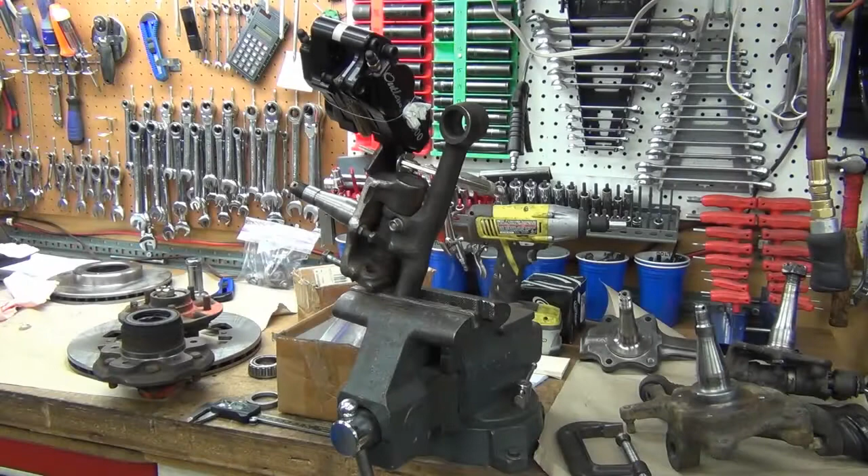Now, I've done a little fitting already, and I know that I can get the nut on here if the seal, if the back of this hub is basically pretty much even with the rise, God, head's not in the game today. Anyway, the boss on the bottom here of the spindle.

So anyway, this is about 7.5 from the bearing to the top of the seal here. It's about 7.5 millimeters. Okay, so I took a spacer. It is just a hair over 8 millimeters. I'm going to put that on there, and this isn't precision at this point, it's just a matter of testing fit. So here, these are the same bearings that the hard body uses.

So it's on there loose. I don't have the spacer in it. I'll just have to make sure that I tighten it down enough that it sucks up flat there. So see that wobble there? I'll just tighten it up enough that it no longer wobbles. And I do have plenty of room there for the cotter pin to go in. So now what I can do is take a couple measurements and get an idea here.

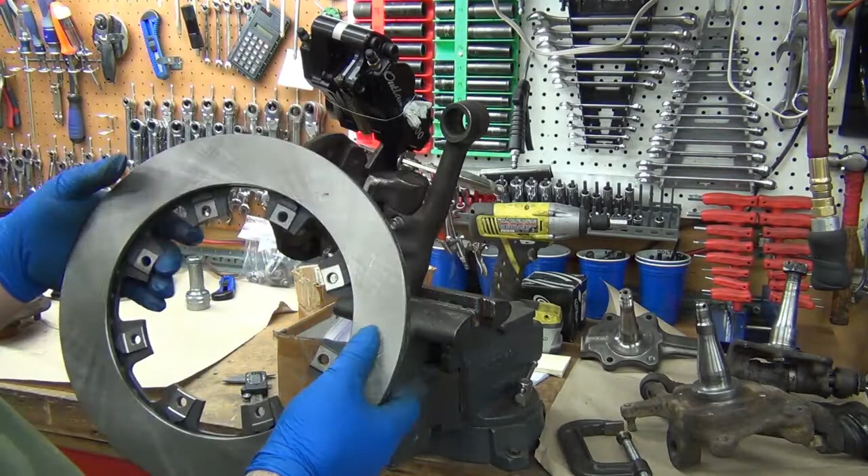There's two choices. Basically, this is the caliper. Okay. 11 3/4, I believe. So for where that caliper is sitting right now, I've got a piece of steel bolted to the face of the spindle, and the caliper is clamped to the backside of it. So that would be like having a flat bracket on there, and thickness of that bracket would not matter at that point. But what that does is that means that the rotor is going to be sitting about there. And I need to take a look. That's about 5/8 of an inch, maybe 3/4 of an inch, which wouldn't be too bad.

That means that the adapter here, I could basically get maybe 3/4 inch plate, you know, aluminum or whatever, and cut the adapter out of that, or have them cut. And that would keep this bracket nice and simple. Also, by keeping it back this way, that kind of distance, we'll do some measuring here and see what I come up with, but I'm hoping it leaves enough for a 3/8 inch bracket back here. Okay.

So let's see here. From here to here, I want to stay fairly parallel with the plane there, and then I want to rock it back and forth to make sure I'm even, and it's basically 55 millimeters. It's 55.07. We're going to call it 55. The rotor is 21, okay? So where'd my pencil go? We've got 55 millimeters of space to play in. We've got 21 of that taken up by the rotor. Okay, that leaves us 34 millimeters to play with.

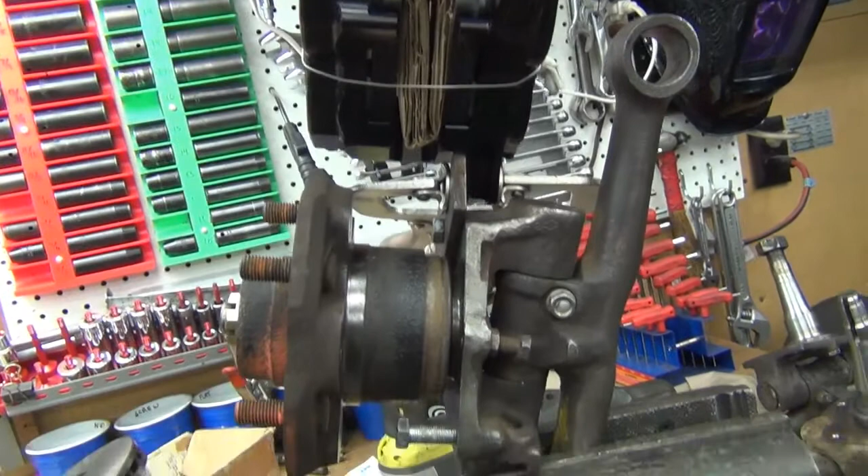We'll get a little bit different perspective here. This is what I'm talking about with it being flush with the boss there at the bottom. There's just a little gap in there. See it at the bottom there? So it's pretty close.

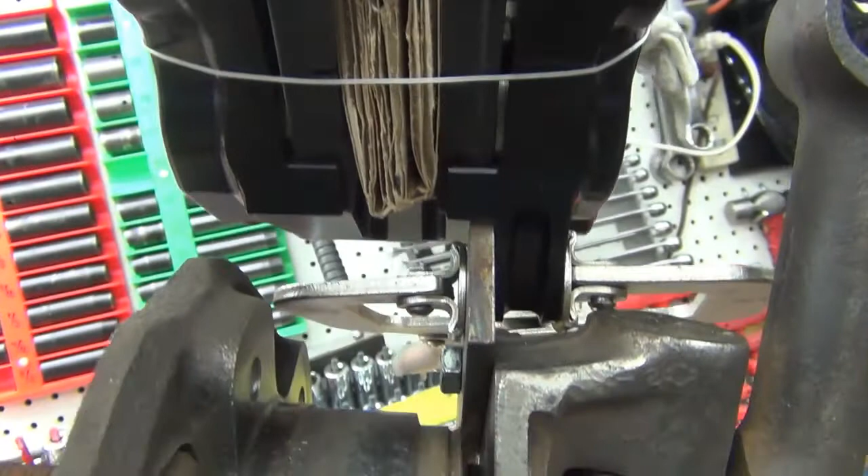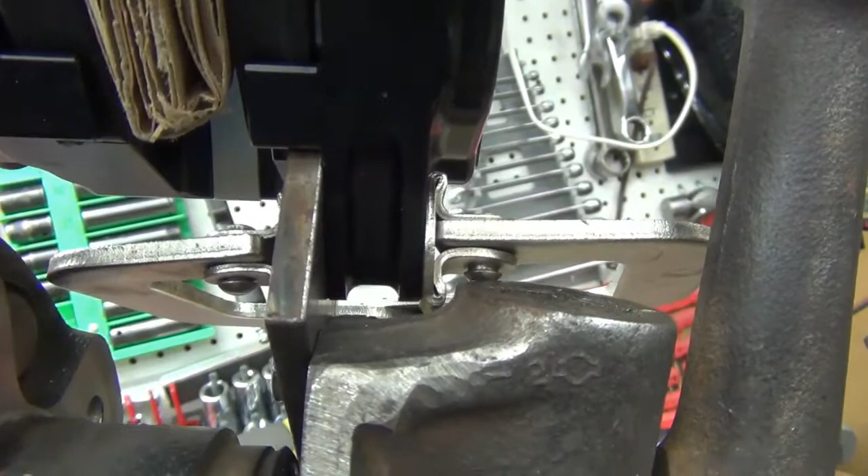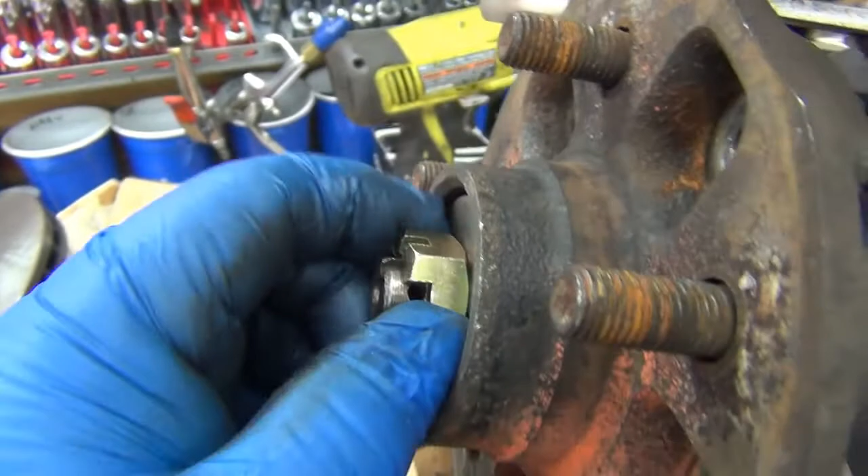You can see from where the pads are at that I easily have another 1/8 of an inch right here, because this is a 1/4 inch plate. I could easily come out another 1/8 of an inch and still clear the rotor easily. And so then let's see here, and that's where we're sitting with the hole. Perfect.

Now this is the shorter castle nut that I use in some of the other projects and stuff like that. So okay, here's the idea. Here's what I'm looking at. This is what the spacer looks like typically. So if I take this off, they use the same bearing. So that's like that.

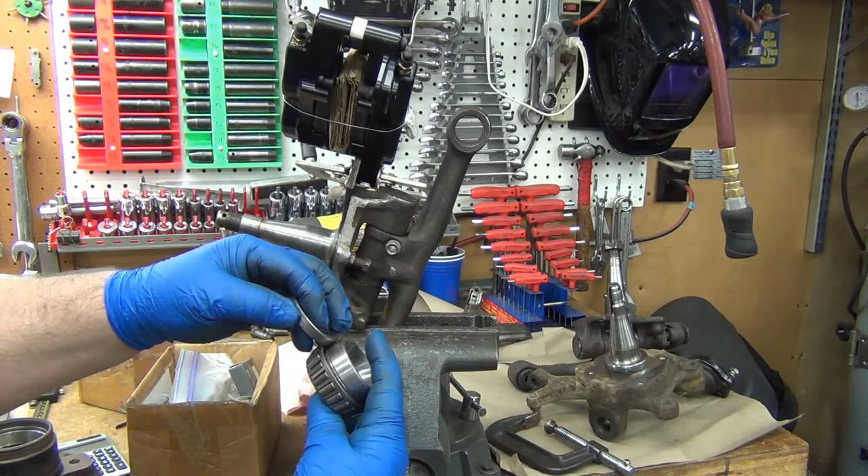Now what I need to do is I need to cut the back there down to the 8 millimeters. I need to take 2 or 3 millimeters off there because I think it's about 12 right now. So what that'll do is that'll go on there, but it'll be a good bit shorter, and that'll get the bearing set where it's supposed to be. And I'll double check the measurements.

Well, let's see here. We can tell right now. I want to make sure that the bearing doesn't bottom out. And if I bring this in here, I can see the whole hole. Yeah, so I'm nowhere close to having the bearing bottomed out. So that's good. That's one of those other things to kind of check on.

When you put it on a hard body hub, something like that, it's a little on the long side, and guys crank these down extra hard to get the cotter in. Well, that loads the bearing up too tight and kills the bearings prematurely. So anyway,

looking good. The easiest way to do some of the rest of the measurements here will be to put it in CAD. And I can also take a few measurements here. Actually, if I look this up online, chances are good the measurements are already there. I just got to print them off. That tells me how far it is, and it makes it even easier because it tells me what radius this is on. So then I can set that radius from the center here with the rotor I have. I'll see if I can explain that a little later when I got something more to look at.

Just like this is the stock Toyota rotor. That gives you an idea what it's moving up to. Okay, and so you can see what I did is I basically took one of the test adapters that I use for the hard body upgrade, the other 521 disc brake upgrade using hard body stuff or 720 stuff, and I cut it down here to the 8 millimeters.

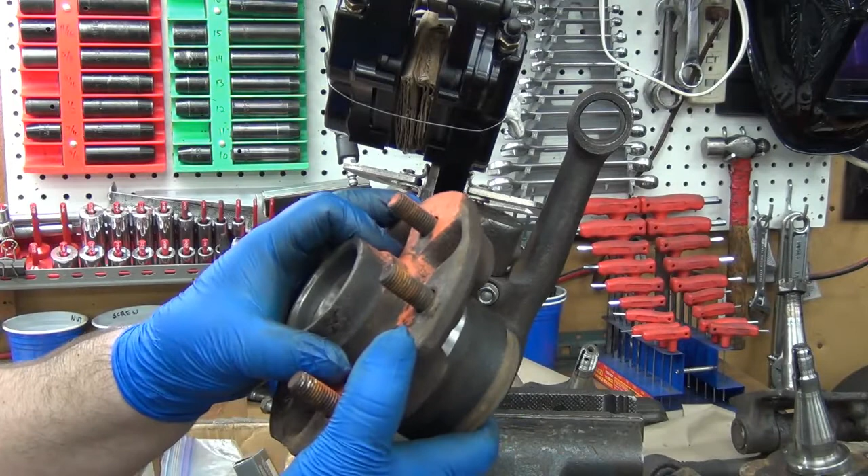And what that does is that puts the seal just real close to the back here. But there's enough room for the seal there, and it looks like everything's going to fit. And that keeps me from having to modify the hub. Because the other option would be, if I had to have more space there, I could cut the shelf in here and push that inner bearing race in further and buy more room for the seal.

I could also do the same thing out here in order to get the nut on and still get the cotter pin in. But the way it's looking and lining up right now, I'm not going to have to do any of that, so there won't be any hub modifications. So it's looking pretty simple. Not exactly sure that means it's going to be easy, but I think I can take the dimensions and most of this stuff I can create in CAD, especially since I already have the 521 spindle drawn. So that's what I'm hoping. We'll see.